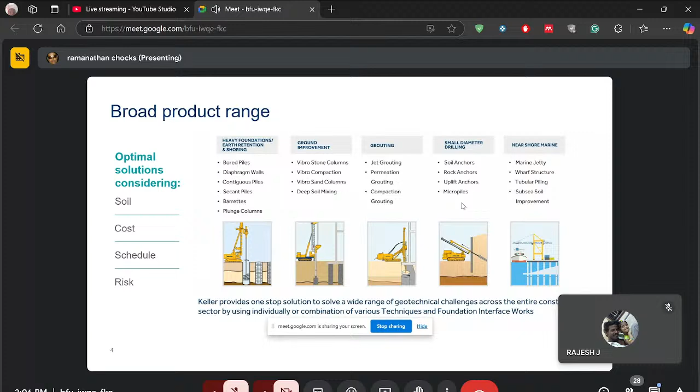To show our global presence, we are working in about 40 countries, with about 10,000 people on Keller's rolls, and we are presently executing more than about 7,000 contracts every year globally. As for our product range, we are mostly involved in heavy foundations, ground improvement works, specialized grouting works like jet grouting, compaction grouting, permeation grouting, and several types of rock anchoring and soil anchoring works. Recently we started working in near-shore marine works, not completely offshore, but near shore marine, for jetty works, the installation of pilings and jetty walls. So those kinds of jobs we have also started picking up.

So this gives an overview about Keller and our presence in the global market. Moving further, this is the overview of today's presentation which I would like to deliver to you all.

One topic is about understanding the various foundation problems. Just a few notes - most of you might be aware of some of these things already. Whatever you are aware of, you can correlate with what I'm presenting, and if anything is new for you, please take it as a good takeaway for your further understanding of the subject.

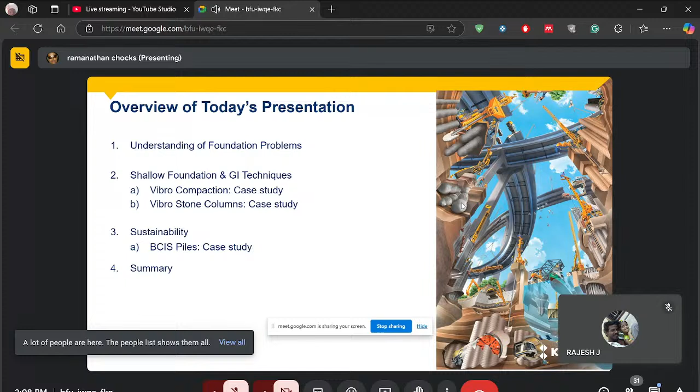We will discuss the common foundation problems, simple foundation challenges, followed by how ground improvement techniques work to address those challenges. I'm mainly concentrating on vibro techniques - vibro compaction and vibro stone columns - and we'll go through some case studies as well. Since the world is moving towards sustainability, I will touch upon the sustainability aspects and what we as geotechnical engineers can contribute. Finally, I will close with summary remarks. This is the overview of today's presentation.

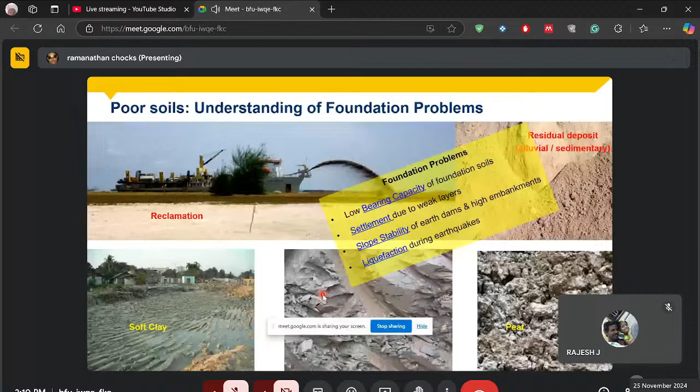So broadly, these are the foundation problems we are going to discuss in today's session. Normally the SBC and settlements might be having more clarity, but coming to liquefaction, here is a small video to make clear what liquefaction is all about.

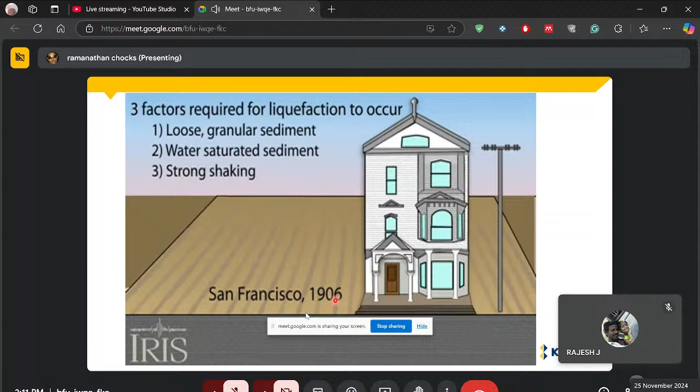You can have a structure, and you'll have deposits of loose sandy layer present beneath the ground in saturated conditions. So what will happen during shaking or earthquake conditions? The pore water pressure will have a rapid buildup and tends to seep out to the surface, generally trying to escape. During that time, the soil turns into a liquid medium, and you will have the failure of the structure. So this is all about liquefaction.

For people who are not aware of liquefaction, this is just a simple explanatory video to make you understand or comfortable with the term liquefaction.

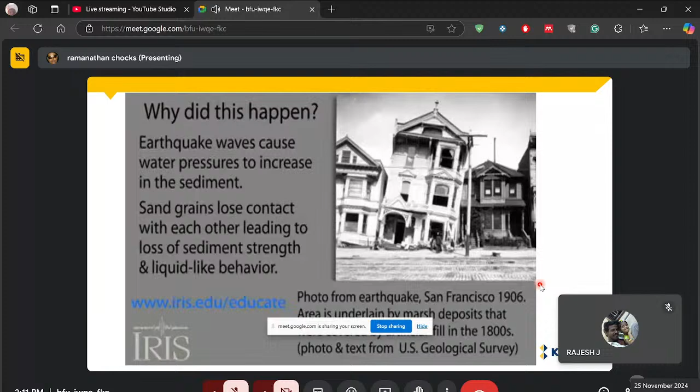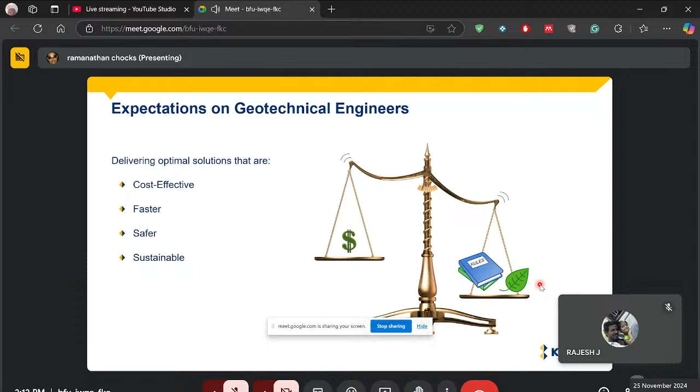So what does the industry or the expectations from geotechnical engineers look like? They always look for a cost-effective solution. It has to be faster and safer, and in recent times, for the benefit of the planet, we are moving more towards sustainability. So these are most of the expectations from geotechnical engineers to provide optimal solutions.

Coming to this background, understanding the problems and keeping an eye on industry expectations, we can address these challenges by improving the ground. One such technique is densification, where we try to compact the soil. The other one is reinforcing, where the soil is not able to be compacted, so you try to reinforce it.

For a better understanding, it's something like how we insert steel into concrete to increase its tensile behavior. In a similar way, you can introduce or reinforce the ground with some stiffer material, so that the load can be shared in a better way between the stiffer and less stiff material.

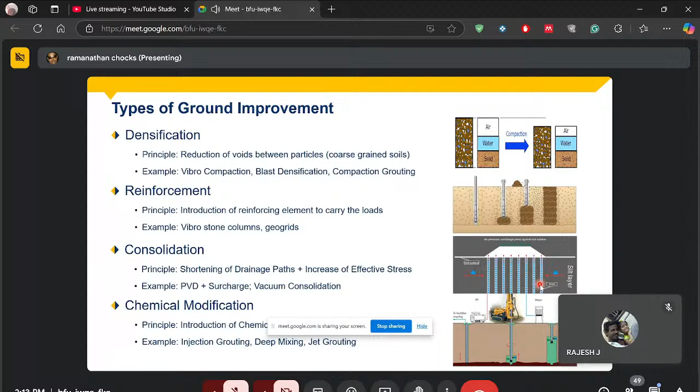The other way is consolidation. We all know cohesive soil has a tendency to hold water within it. When you apply a load on it, it tries to take the water out from the soil medium, from between the particles, the water trying to escape. But this process needs a load to act on it to extract the water from the holding soil bond, and otherwise you have to have a shorter drainage path. If the escape way is very near to its particles, then you will have a faster rate of consolidation. So that way also we can help improve the ground, because this drainage increases the shear strength.

Finally there is chemical modification. Say the soil is in one state, with its own chemical bonding, exerting certain behavioral aspects. If you introduce some other material, it will turn into a new material. In that way, the engineering properties of the soil can be modified by creating a chemical reaction within the soil and the material which you want to use. So that is chemical modification.

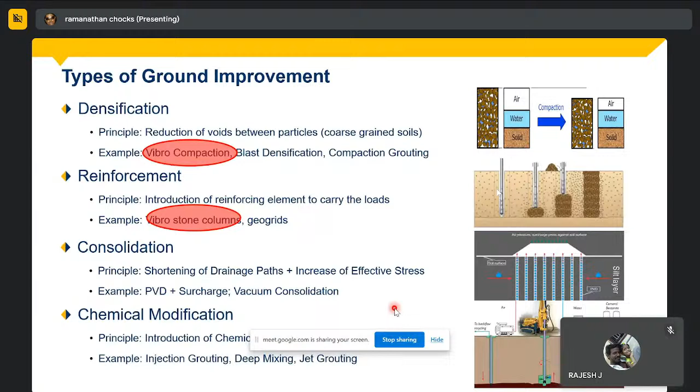So these are the common ways of improving the ground. Today, as I said, we will mostly focus on vibro techniques, that is vibro compaction and vibro stone columns.

Just to give a brief overview of where we look for ground improvement - it is not like everywhere we go for ground improvement. We will see how and when we can pitch in there and see the opportunities for ground improvement. In a conventional way, if the load is lighter and the soil is competent enough, we will go for the shallow foundation.

And if the loads are heavy and the structure sensitivity is very high, and you can't afford more settlements, you will go for the deep foundation. These are like two extremes of our conventional solutions - there's a shallow foundation and the deep foundation.

In between, there is a zone where you can afford for a little bit of relaxation in the settlement criteria, or you can afford more settlements proportionate to the load. That is the zone where we speak about the feasibility of ground improvement. So if you see here, you can see points number 1 and 2, and 2 dash, which speak about the relative load and its settlements.

So if you are allowing for more loads with less settlements, obviously we have to go for the pile foundation kind of solutions. And when you can afford more settlements, you can see the settlement value from 2 dash to 1 to 1 dash. If you see the settlement value, the relaxation is a bit more, so in that case, you can look for ground improvement.

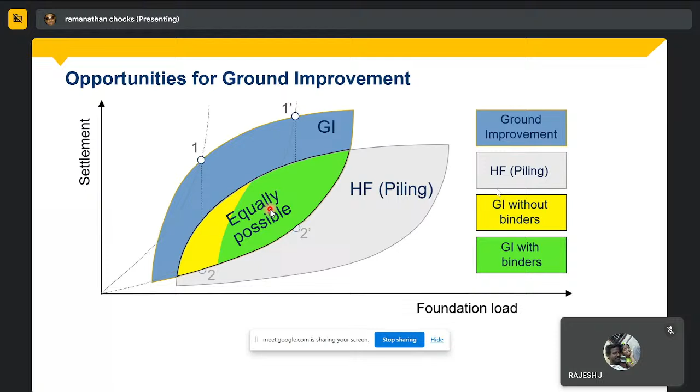So in a simple way, if you want to have more load taken care of by the soil, but you can allow the settlement to a certain extent, ground improvement is an option which is always available to look after. That's about how the ground improvement solution will be pitched in the market.

So now coming to the techniques one by one, as I said, we will consider the vibro techniques. So what is meant by deep vibro techniques? Generally, it's like a simple expansion of the techniques which we do on the surface.

So normally for surface compaction, if you are laying a road, everyone might have seen - you'll have several layers, let's say subgrade layer, subbase layer, base layer, and the top layer. But every layer will be rolled and compacted. That's what we term as surface compaction.

If the same amount of compaction treatment is required deep down into the soil profile - say 10 meters, 15 meters, or sometimes up to 20-25 meters - if you want that degree of improvement, we will opt for the deep vibro techniques.

So it depends on the type of soil material. It will be classified into vibro replacement or vibro compaction. If it is clean sand, in the sense compactable sand, so the fines content - normally we say less than 75 micron particle size - has to be less than say 10 to 12% of the composition of the soil. Then the vibro compaction is the most feasible and optimal solution.

And if the soil has more fines content - say the presence of silt, even if it may not be purely plastic in nature - if the silt content is more, whatever energy we put forward for compaction will not reciprocate or transfer from particle to particle. So basically your compaction effort will go in vain. To avoid that, it's always careful to study the suitability of the soil in selecting vibro compaction. So first let us see about vibro compaction, and later we go into vibro replacement.

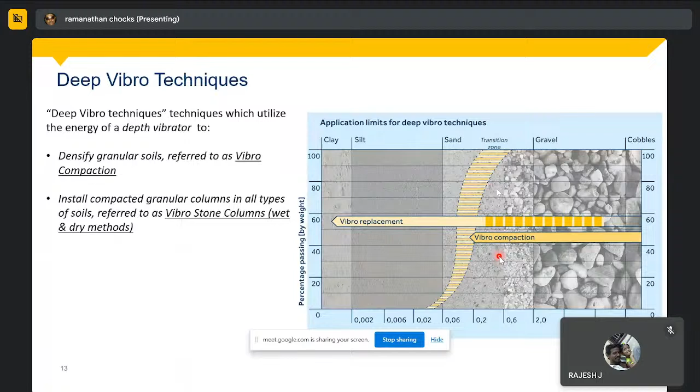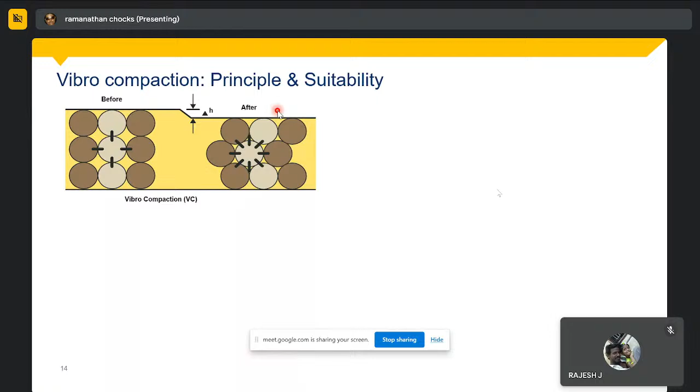So that's what really happens during this vibro compaction technique. This is like a loose stratum as an initial condition. But when you try to compact that stratum, it will move to a denser configuration. This much volume of sand has been made to subside to form a denser configuration. So either you can have a foundation at this level, or you can have additional filling from the surface to compensate for this subsided volume. So this is a simple way the vibro compaction can be explained.

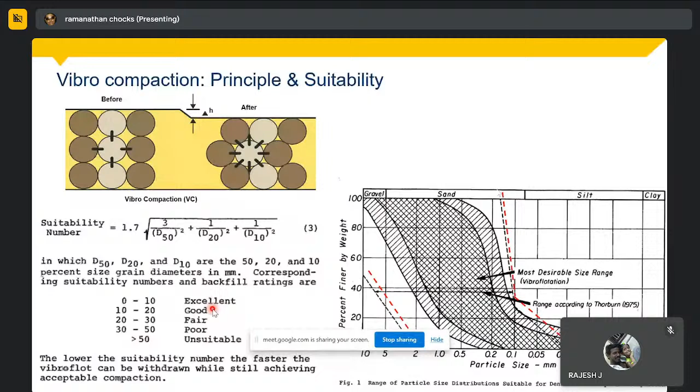As I said, the suitability has to be studied. It has to be in the clean sand range, and based on the soil grades, you'll be doing the gradation test for the soils, and you can have the D50, D20, D10 size of the soil particles. With that, we can have a quick estimation of the suitability number. If the suitability number is 0 to 10 or 10 to 20, it is of a good to excellent kind of soil for compaction. If it is more beyond that, it will be problematic to compact. If it is more than 30, we generally avoid the soil for compaction and think about other alternate techniques.

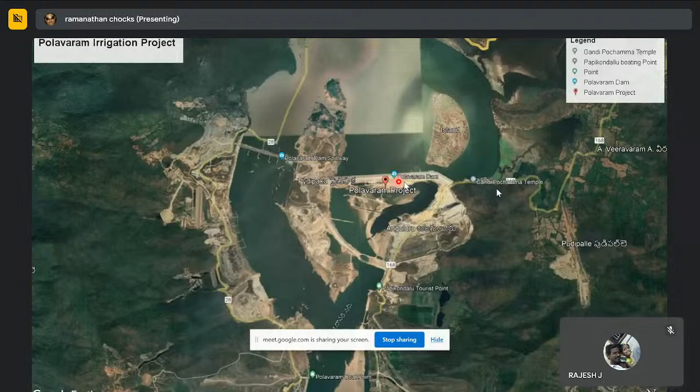To develop this dam, we'll have to construct a coffer dam. This coffer dam will be on the upper side like this, and on the lower side it will be like this. This coffer dam will facilitate the dry area for the construction of the dam over here.

The condition here is mostly soil, the subsoil condition is mostly sandy in nature, and the challenges we foresee here are mainly settlement and liquefaction. So for that, we have to densify the in-situ soil so that it takes the load with a lesser amount of settlement, and meanwhile it will ensure the minimum factor of safety against liquefaction when the earthquake scenario comes.

With all this scenario, the vibro compaction zone has been identified to be treated. Based on the suitability study, we felt that this portion has to go on stone columns, because we have the presence of more silty nature of material, or more towards clayey nature of soil over here, where vibro compaction cannot be directly employed. Hence vibro stone columns were utilized here, and here vibro compaction was carried out.

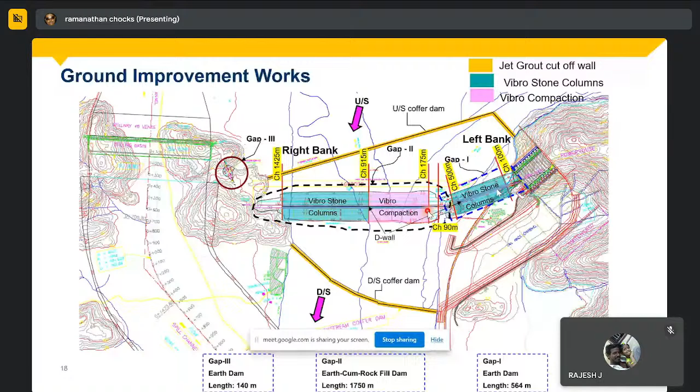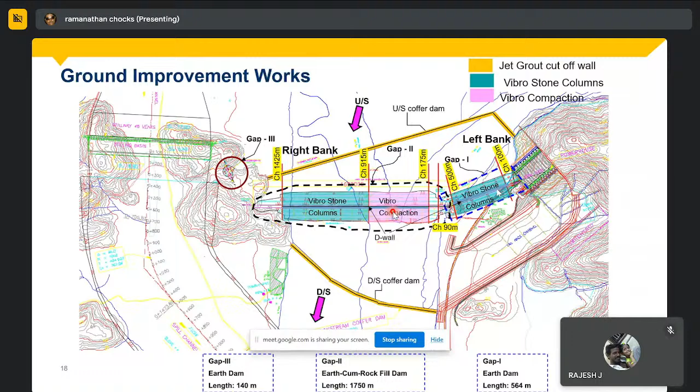This is the center line of the dam, where you will have a cut-off wall, or you can say a plastic diaphragm wall, installed all the way to the rock bed layer, and then we will have compaction on either side of the dam center line cut-off wall. This is how the vibro compaction solution has been employed for this particular dam construction.

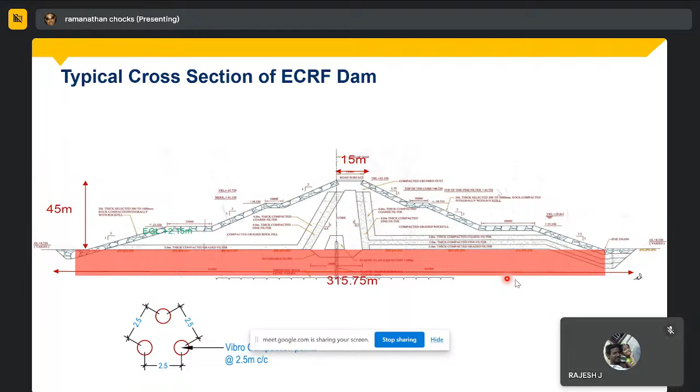You can see the top width is about 15 meters, and the height is about 45 meters, and to showcase the massiveness of the structure, it's about 320 meters across the section. So almost you can see the width of the extension from the center line of the dam. So this mass area has to be treated.

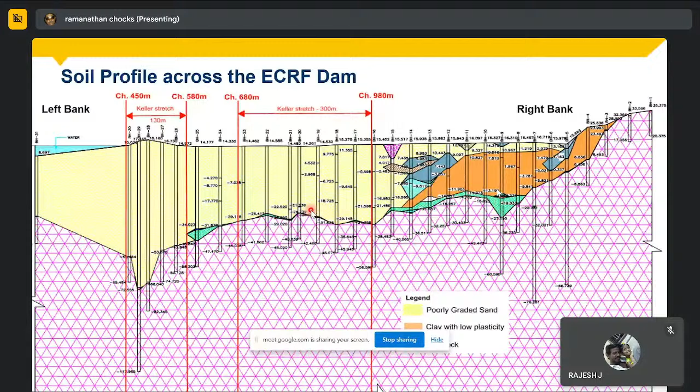This is the subsoil condition, where the condition was more towards the sandy type, predominantly up to a depth of some 18 to 20 meters, and then more towards the rock outcrop, you can see the clay deposits were present there. This is a typical condition of the particular site, and we may need to go all the way where the N values are very high, of very dense range. That is the minimum requirement for the treatment here.

Ram sir, sorry to intervene, you can just hide that band in the PPT. Hide it. Oh, this one, sorry. Yeah, thank you, thanks for notifying me.

Any job will have, we need to understand its efficacy. It's simple, like how we do a cube strength test to ensure the strength of concrete. For ground improvement also, we should do some post testing, so as to get the confidence that the ground improvement technique has done its purpose or satisfied its purpose.

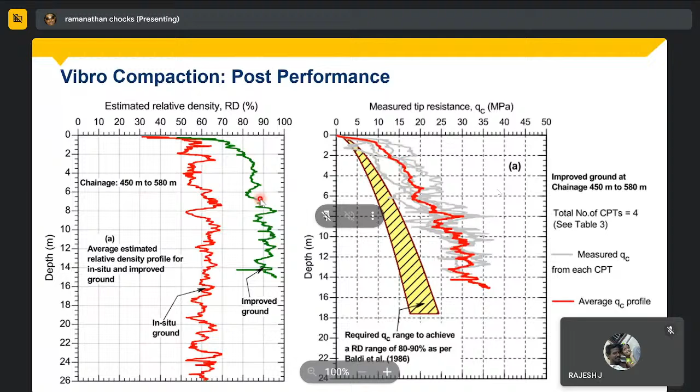So I hope everyone is in alignment with me till here. Is everyone clear till here, or do you have any doubts, or shall I proceed further? Please proceed, sir. Yeah, thank you.

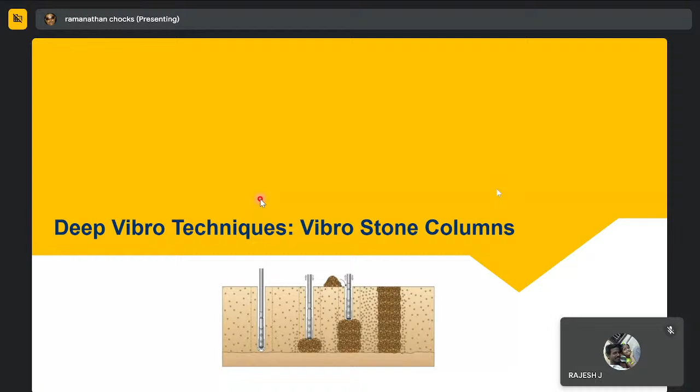So now we will move on to the other technique, that is the vibro stone column. Similarly, as I said, you will have the feasibility study - if the soil is really compactable, we can go for vibro compaction. But if the soil is not of a compactable nature, we can think of the other vibro solution, which is vibro stone columns. So we will see how the vibro stone column solution works here.

In a simple way, this is the in-situ ground, and we are inserting a stiffer material - stones - in a certain pattern or spacing, with a nominal diameter consideration. So this much diameter is the stone that is going to be formed, in a certain configuration. If you introduce this stone into the in-situ ground soil, you get a composite material behavior - that is the stone column, the ground improved with stone columns.

So what will happen - the initial C and phi properties, when improved with the ground, will have a composite behavior. So these improved properties we will consider or take into the design of the foundation or the structure, the foundation design for the structures. So this is basically how the improvement using vibro stone columns works.

Each column will have its own influence area, which we call the unit cell area. Each packet is a unit cell area. How much percentage of this unit cell area we are replacing with the stones is the area replacement ratio, and this is nothing but a function of the spacing and the diameter.

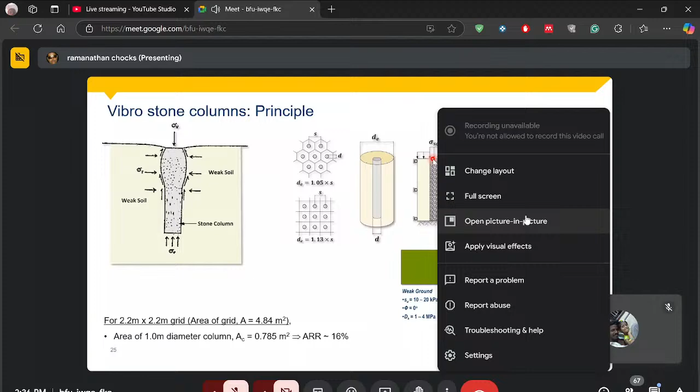When it comes to load sharing, this is not a mass treatment. You are inserting a stiffer material at regular spacing, so the load will try to share between the soil medium and the stone column member. Whatever load you transfer from the foundation, partially it is shared to the soil, and majorly it is shared to the stone column, because stiffer material will attract more load to it. That's how the stone column load sharing behavior works.

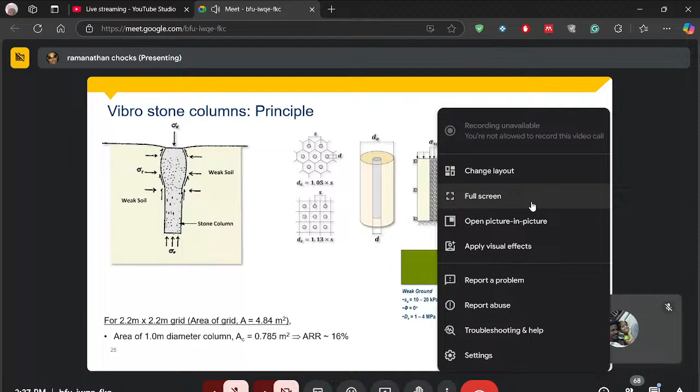With this composite behavior, you take it up for the foundation design. This is basically the design principle behind the stone column method, and globally we practice the Priebe method. Priebe is the one who gave this understanding of the stone column subject with composite material behavior. There are several other ways of designing too, like in IS codes, where we design the stone column based on its own capacity, similar to how we design a pile. That's another approach for stone column design.

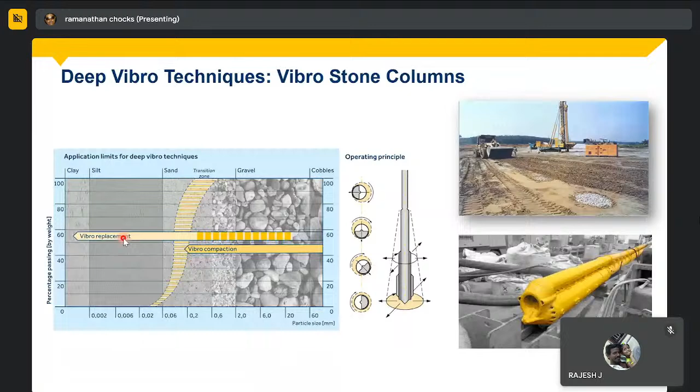The range of application is more for vibro replacement. It can even be used for sand where fines are in the range of more than 10 to 12%. Even into clay and silt, we can employ this methodology of vibro stone columns.

So there are two methods for carrying out this stone column technique: one is the wet top feed method, and the other is the dry bottom feed method. Design wise it's the same, but how it translates into the ground can be done in two different ways. From the terminology itself you can understand what wet top feed means.

Wet means we are using water to penetrate into the ground, similar to how in vibro compaction we need the support of water to penetrate, and we feed the stones from the top - that's why it's called the wet top feed method. With the water jet, the probe penetrates, and from the top we feed the stones, which travel through the annular space created by the vibrator and reach the bottom, getting compacted there. That's how the vibro stone column is formed to the required diameter. Based on how much volume is consumed for a particular column formation, the diameter can be verified. So that's what the wet top feed method is all about.

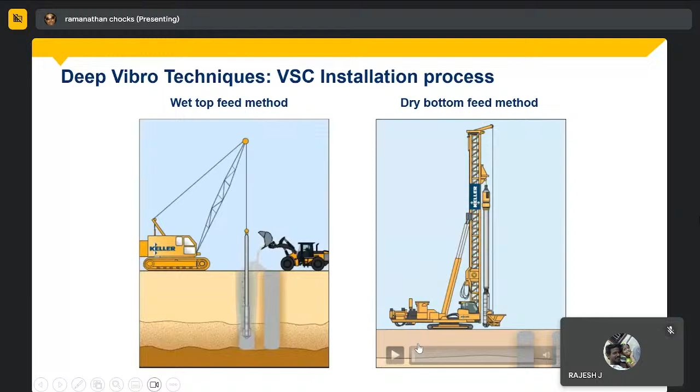Moving on to the next one is the dry bottom feed method. As the name suggests, it's dry, so no water is utilized for this formation, and it's a bottom feeder, so the stone has to be fed directly to the bottom of the hole which we are penetrating. This is like a Keller-made vibrocat, and you will have the vibrator setup here, which penetrates on its own thrust and the power of vibration.

Once it's penetrated to the desired depth, the stone is fed to the hopper, and this takes it into the stone tube. All the way down you will have this stone tube, through which the stone reaches the bottom. Once it reaches the bottom, it will be compacted in stages. So this is the other way of forming the stone column.

There are several factors based on the soil condition, based on water availability, and so many other factors in selecting the particular method of vibro stone column installation.

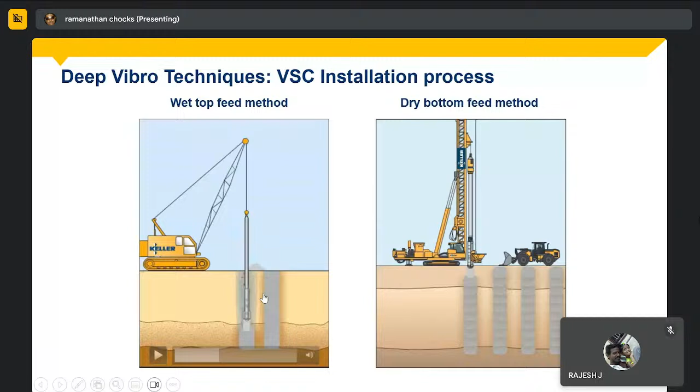So hope you are very clear about the types of techniques we can use for the vibro stone column process.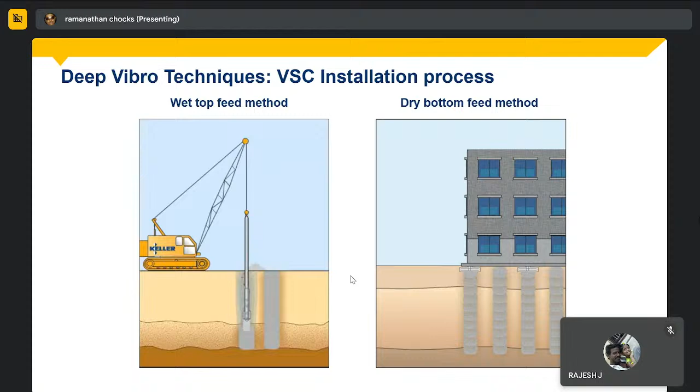As I said, this will be crane hung, and you will have the rotating motor here, and water jets through this nose cone. Through this only, the water will be pumped or jetted into the ground to create the cavity formation. As I said, in the dry method, you will be having a stone tube all through from top to bottom, giving provision to take the stones to the bottom. And you will have the vibration, the eccentric weight here to create the oscillatory movement within the particular point.

Once the stone reaches, you push the vibrator up and down so that it gets compacted properly. Unlike a pile, we are not forming a pile here. Basically in a pile, we can have a very uniform diameter formation, because you are completely drilling a bore, taking the muck out, and completely concreting it.

So the diameter formation will be more uniform in piling, whereas in the stone column, it depends on the nature of your stratum. Your diameter formation will vary. You can see here, it's not uniform - you can see a slight bulge. This means the soil is weak enough over here, which is why it is consuming more aggregates.

And if you see here, it has a lesser diameter, which states that the soil is a bit stiffer in nature, that's why the consumption is less. So that's why you are not forming a pile - instead, you are forming a granular column, which will not have a uniform diameter all the way.

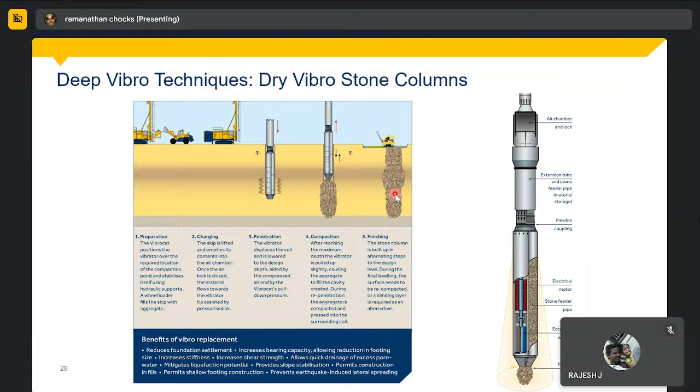This is a common doubt we get from those from non-geotechnical backgrounds, who put forward this question to us so many times. So this is for better understanding.

As I said, we have these vibro techniques. One way, after completion of all tests, we can have ground testing like post-performance testing in terms of penetration tests and all. But during the column build-up itself, we will have real-time monitoring of how the column is being built inside the ground, or how the ground is getting compacted, so that we measure it in real time.

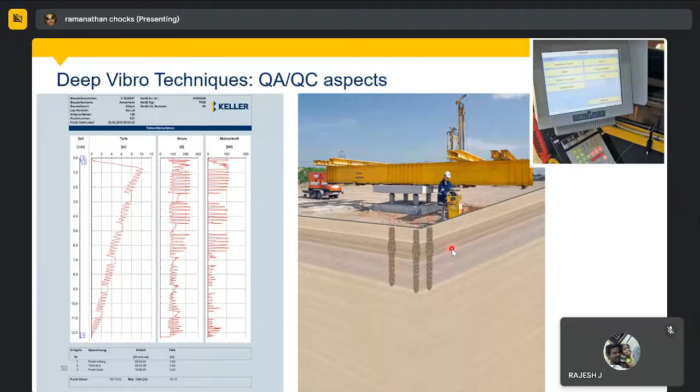And finally, through liquefaction mitigation: one way against liquefaction is to have your soil in a more denser state. If the soil is loose in nature, it has to be improved to a denser state so that liquefaction will not occur. The other way around, during the fraction of seconds, you will have a huge accumulation of pore water pressure, so that has to be taken out. For that, this shorter drainage path will help you, so that the accumulation of pore water pressure will be reduced, and that also provides a way to mitigate the liquefaction.

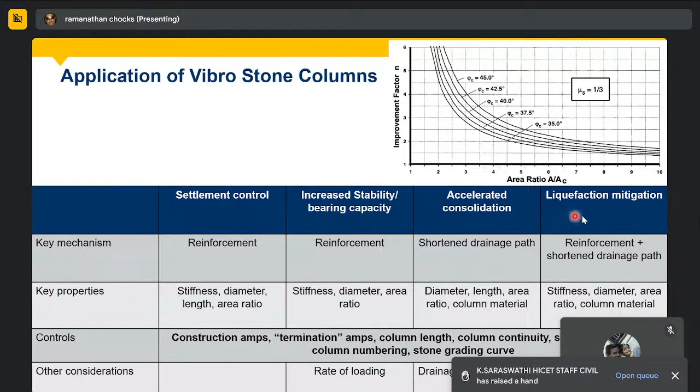So this is all about the application of the vibro stone column. We have covered the application part. Now we will go through a few case studies which we have on vibro stone columns. One area where stone columns work most effectively is for foundations, for tank foundations.

So we have several refineries all through the country, mostly located along the coastal regions. Say right from Paradip, it may be Krishnapatnam, Tuticorin, or somewhere in Cochin, or somewhere in Gujarat.

If you can see all the coastal area extending to Mangalore, all this coastal area will have challenging ground conditions, basically weaker deposits. All the incoming crude oil supply we take from external countries will be stored here and transferred to other nations.

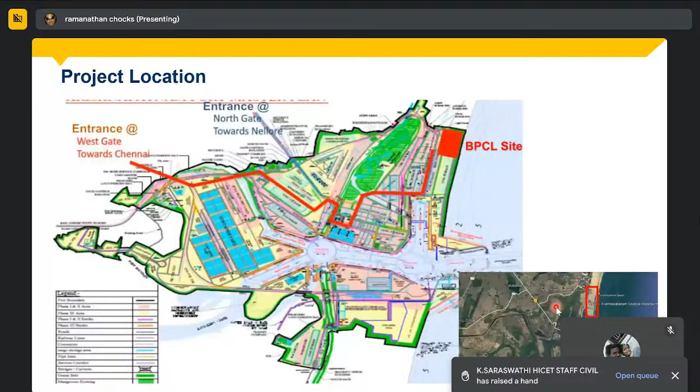Or sometimes if you want to export the treated fuels, that also needs storage facilities. So to facilitate this, we will have so many storage tanks built in the refineries or marketing terminals all through the coastal borders.

So we have this kind of tanks, and the solution of ground improvement is more viable for the tank foundations, mainly because for tanks we have allowable criteria like 150mm to 300mm on the edges, depending on the type of roof. The allowable settlement range is between 150 to 300mm, which is a performance requirement for the tank cases.

The loading intensity generally ranges from as low as 120 or 130 kPa to as high as 250 kPa. Something like 15 to 25 meters of storage height. In this particular case, it's 15 meters storage height.

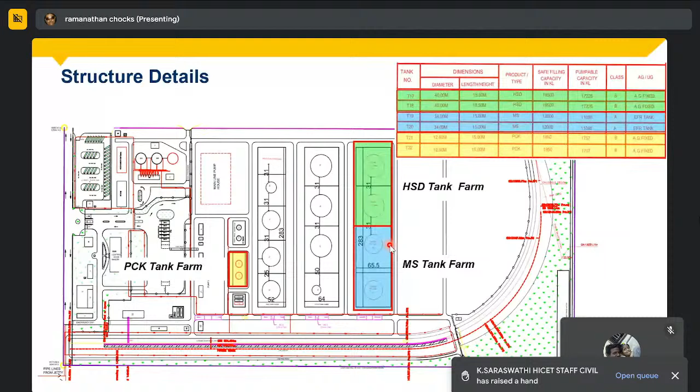And the tank diameters, you can see it's something like 40 meter for 2 tanks, 34 meter for 2 tanks, and 13 meter for 2 other tanks. So these are the tanks which we have treated with ground improvement using vibro stone columns.

So I explained the performance criteria just now. Here 180 kPa is the design loading intensity of the tanks, and the performance depends on the type, based on how the tank's roof is designed. If it is a fixed roof, the criteria allows for more settlements.

And if it is a floating roof, basically upon filling the liquid, the roof top will move, it will just float on the liquid we are storing. That floating roof will have more stringent settlement criteria - allowable settlement less than 150mm for the floating roof, less than 300mm for the fixed roof.

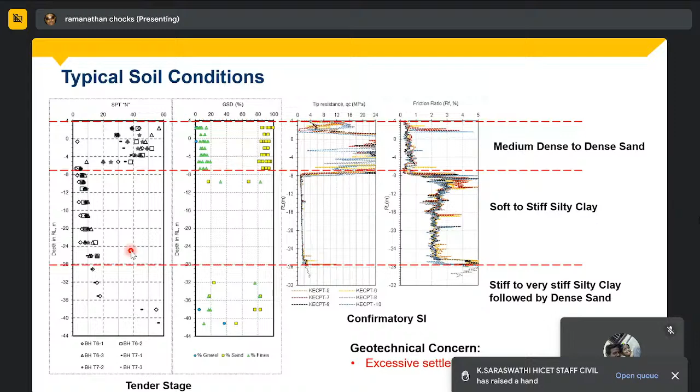So that's how the vibro stone column has been employed. The maximum ratio was about 33%, and the minimum for the smaller tanks was about 18%. We formed about 800mm to 850mm diameter stone columns, all the way up to 32 meters deep. In fact, this is the deepest stone column on record in India, beyond which no stone column has been carried out so far.

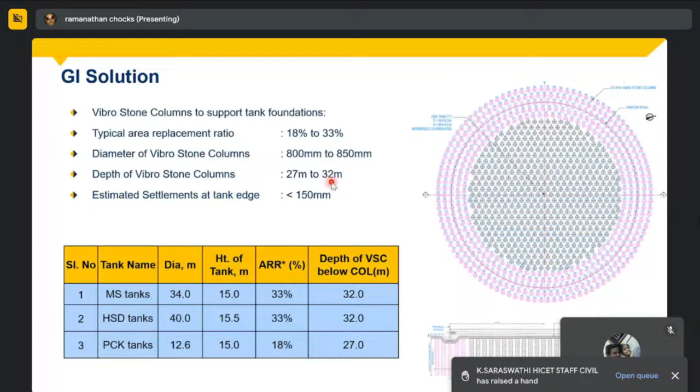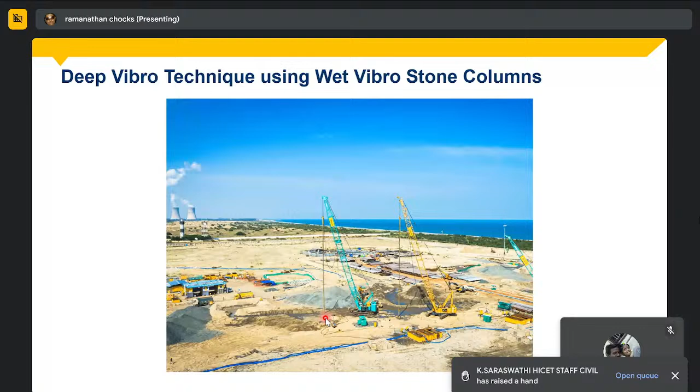So this is a site setup where you can see the crane. This improvement was done using the wet top feed method. You can see the vibrators, and with the support of water, it has been penetrated into the ground for the formation of vibro stone columns.

This is a typical M4 record of the vibro stone columns. As you can see, we can reach almost 32 meters. This is a scale of 40, and we have reached about 32 meters over here. And then this is the washings, basically to create annular space between the vibrator and the surrounding soil. Then only the stones will flow through this medium. So this up and down movement is called washings.

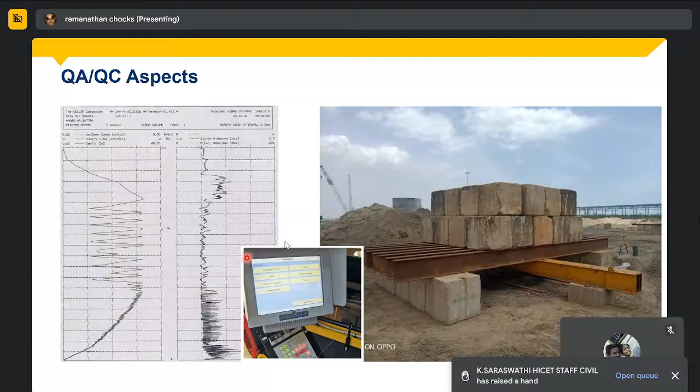And once we have sufficient washings, we will feed the stones from the top. So from here onwards, you can see the compaction, consistent compaction effect witnessed over here, and the column has been formed successfully. For the post performance, we will test with the load test.

So this is the completed view of the tanks, where the tanks have been completed and handed out for the superstructure erection, where steel elements will be placed on top of this to form a storage tank on top of this ground.

So moving on to the next case study, this is for a food production manufacturing plant in Assam. Assam is a seismically vulnerable zone, high risk zone. So here the problem is liquefaction. It's about 34,000 square meters of area. The plant is supposed to be established, but they can't take chances with this seismicity.

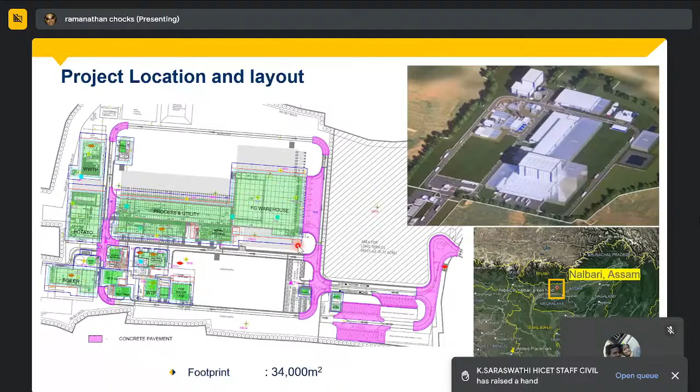So they wanted some ground improvement. And to complicate the problem further, they have very soft to medium stiff clay layers at the top, and then a liquefiable sand layer at the bottom. So it's not one problem, it's really two problems: the problem of settlement and bearing capacity with the clay layer, and the problem of liquefaction with the sandy layers at the bottom. So these two have to be addressed.

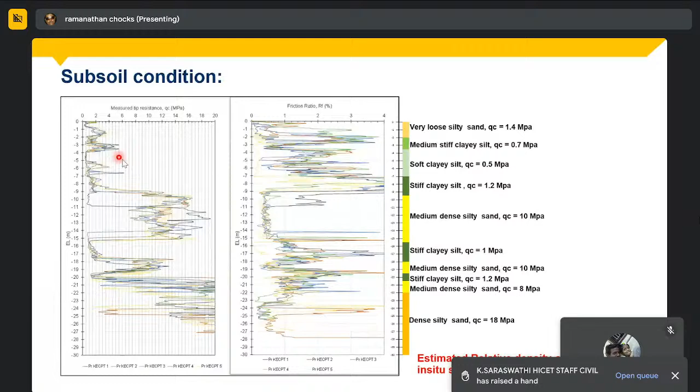So again, the criteria was something like 100 to 140 kPa loading. Here, almost all the foundations were shallow foundations, and so the settlements, as per IS code, were allowed only up to 50 mm. But for the raft, it was about 75 mm. These were on the long-term perspective.

So once the structure is during construction stage, the settlements will undergo. But because of no external connections, it's still allowable. But once the structure is completed or into service, you can't allow more than 50 mm or 75 mm for the given load of 100 kPa and 140 kPa.

And seismically, we have to design for this, the most stringent seismic criteria we have in India. That is the Assam region, Assam and North Himalayan regions have this criteria. It will be categorized under zone 5 with a PGA of 0.36 and magnitude in the range of 7 to 7.5. So your factor of safety against liquefaction has to be greater than 1.

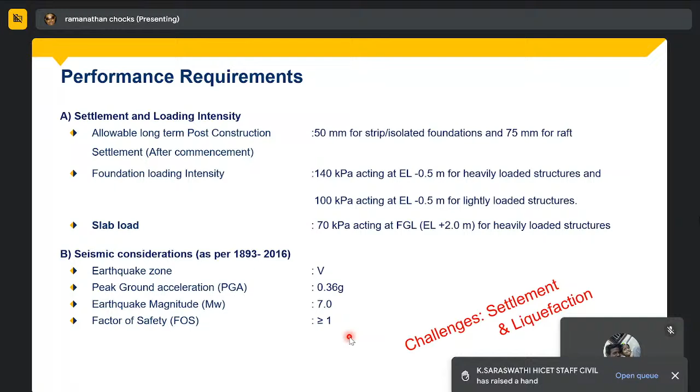So here we proposed an innovative solution of having vibro compaction and vibro stone column. Vibro compaction will be done for the bottom half portion, and vibro stone columns will be done for the clay soil. Because the sandy soils were found to be very clean in nature, they are compactable. So we used the same instrument and the same material.

Setup. It will go through the bottom, compact the bottom soil, and then when it reaches the clay stratum, the stone column will be formed the same way. So it's an innovative approach we adopted here to pass on the benefit of optimization to the client, so that they would be financially happy to see the reduced cost of the project.

So this is all about the solution we employed for this food production facility. Here the maximum ratio was about 32%, and the depth of treatment was almost 20 meters maximum we went. 16 to 20 meters was the depth we treated here.

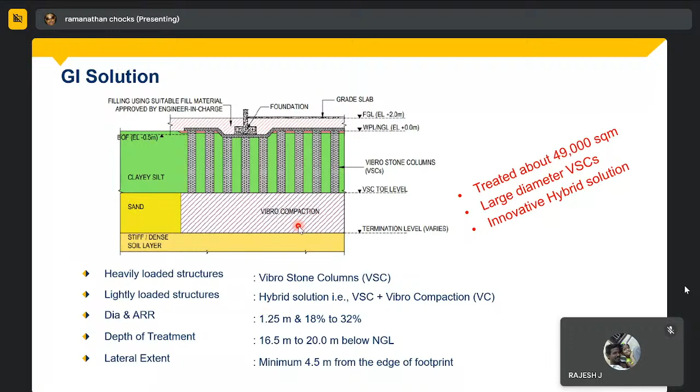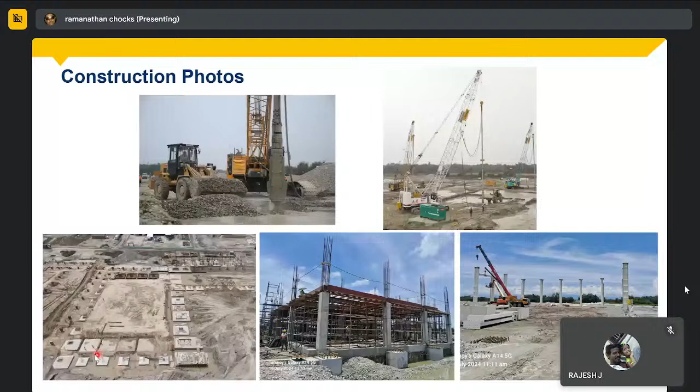These are some construction site photos where the ground will be improved with the stone columns, and you will have the foundation construction on top of that, followed by the superstructure construction.

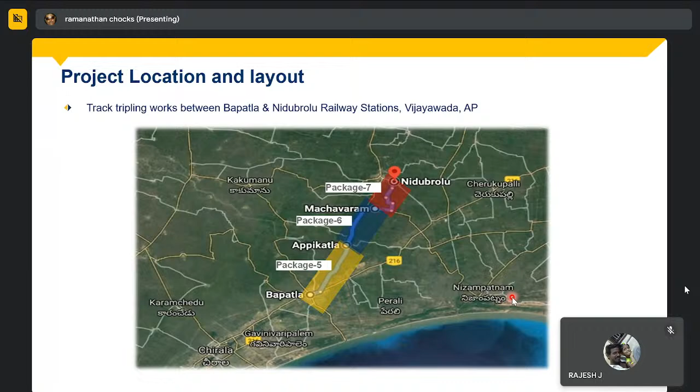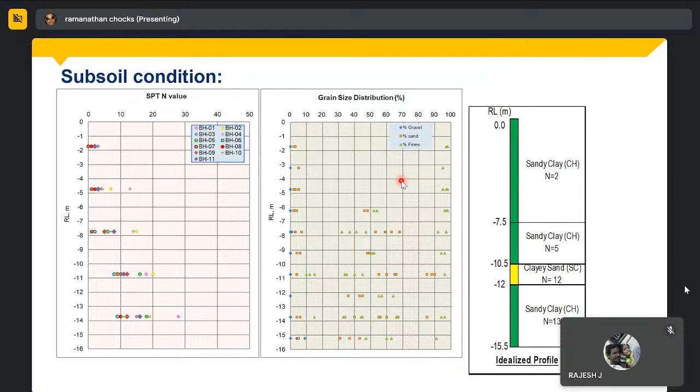Moving on to another case study of railway embankment. This is a very interesting case study for a station line doubling, basically tripling, of an existing railway alignment. It is in Andhra Pradesh, where the soil type is sandy clay in nature, soft to medium stiff, for the top 10 meters, which has to be improved. Otherwise, to ensure stability of the embankment, this ground has to be treated. This is the existing alignment, and you want a new alignment with improved speed, so currently there are some speed restrictions.

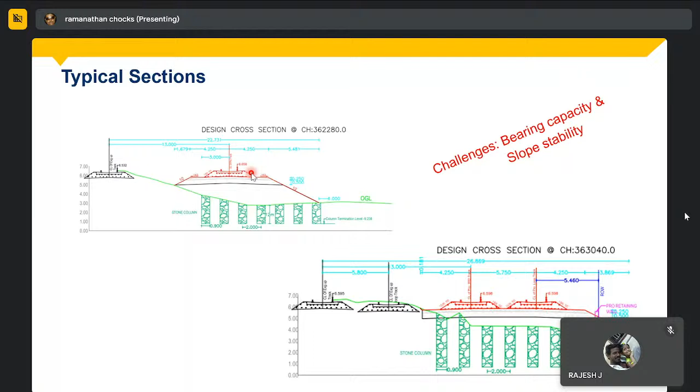To achieve proper stability at higher speed, they proposed vibro stone columns to improve the ground in the weaker profile sections. Here we carried out vibro stone columns next to a running line - a live line with many trains passing every day, a busy route. We had to execute the works very close to this working railway line. The depth of treatment here is about 12 meters, with an 18% area replacement ratio adopted.

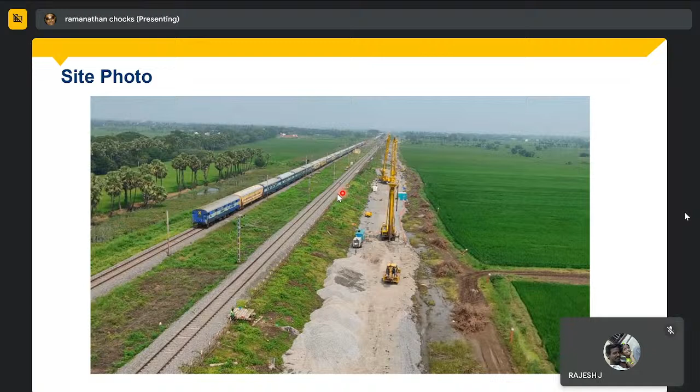Moving to the final case study, a mounded storage vessel. This is very common - storage of fuels happens in circular tanks, and for more inflammable materials, they use this mounded storage vessel, which is the safest mode for storing LPG. This particular facility is for a marketing terminal, for the Indian marketing terminal in Chennai, where you get domestic gas supply. This is where LPG gas gets stored, which will be filled into cylinders and delivered to your home. So this is the storage facility.

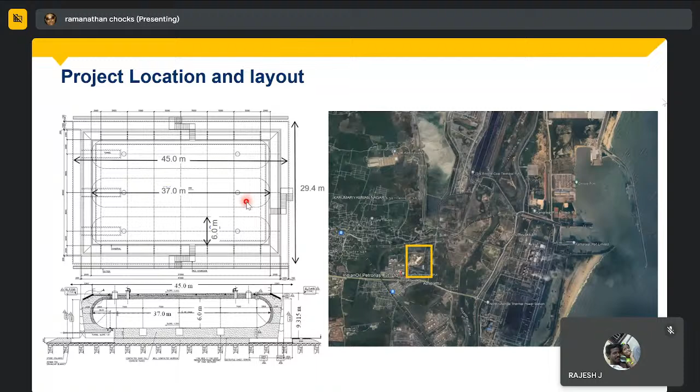Here spherical members will be embedded into the soil. This is the ground surface, and on top of that you create a mound, basically a soil mound. Within the soil mound, we embed these bullets - steel vessels that look something like the petrol carrying vessels you see on lorries on roads, bullet-shaped in nature. These larger bullets are embedded into the ground and covered, for safer storage of inflammable materials. But the performance requirements are very stringent for these mounded storage vessels.

So here the problem is we have a loading intensity of close to 160 kPa, but we have 8 to 9 meters thick deposits of soft clay. You can see here the color - the green indicates the clay nature and the yellow is the sandy nature. So the predominant governing problem here is the settlements we are expecting from the weaker clay layers.

And to some extent, because of the recent upgradation in seismic codes - even though you are in Chennai, if the sands are a bit loose in nature, as per the codal provisions this falls under zone 3 category, which tends to liquefy during a seismic event. So the problems of settlement and liquefaction have to be addressed by the ground improvement solution we are proposing here.

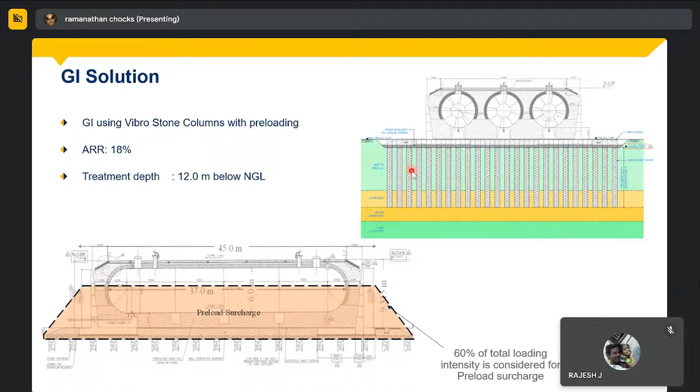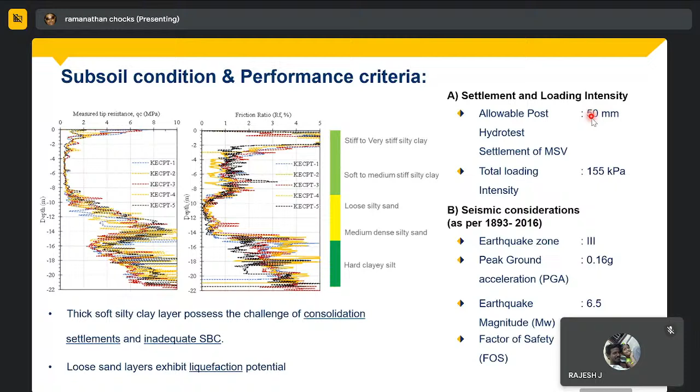Moreover, the concept of reinforcement as well as consolidation will be effectively utilized here, because the estimated settlements for this thick soft clay deposit are very high. At the end of the day, we can allow only 50 mm settlement during the service stage. But the estimated settlement is in the range of 200 to 300 mm even after the improvement.

So what we have carried out is preloading. We have kept a partial load of the future loading intensity - as soon as we treat the ground, we fill it with say 60% of the future load made into a soil mound, and this area has been preloaded before construction of the structure.

Once this preloading is done, and if you are satisfied with the settlements and the degree of consolidation of that particular soil for the given loading intensity, then we can allow for the construction of the mound. So it's like doing things in stages.

You take the ground at the first instance, then load it with the dummy load - a preload surcharge - and once the settlements are as per your expectations, you take out that surcharge and start constructing the original structure, eliminating the risk of later settlements in the structure. This gives you very high confidence on future settlements.

So this is the final results we have taken during the final hydro test. Even though we had estimated roughly about 200-300 mm during the initial stage, during what we call the leakage test, before operations they carried out this hydro test, and during the hydro test the settlements were in the range of 30 to 60 mm.

This is the maximum possible load, because the leakage test is always carried out with water, but the actual fluid will be like a gas or some other fuel, about 0.5 to 0.6 times the unit weight of water. So the actual load will be lesser than the water load, and even for the water load itself, the maximum settlements were only 30 to 60 mm.

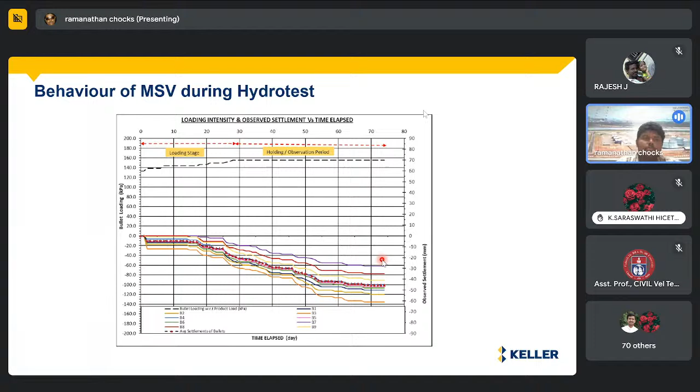So this is all about the solution I'd like to state here regarding the vibro techniques. Going forward, we are moving into a new world of more sustainable visions. So just to give a brief view from the sustainability point of view, I'd like to spend another 10 to 15 minutes on this aspect as well.

As I see it, the pollution and emissions - basically the carbon emissions - are increasing day by day. Over a larger period, the last 60 to 70 years where the industrial revolution has been taking place, we could see more increase of carbon emissions, and we are contributing about 7% of the global carbon emissions.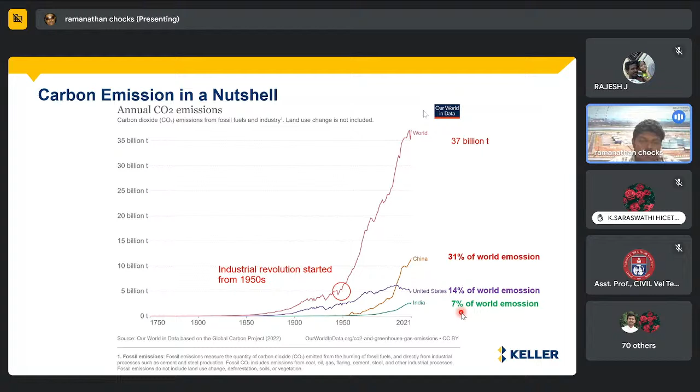So this is like a carbon cycle from where it originates to where it will end. We extract the raw materials, transport it, manufacture in some plant, and then transfer the final product to some construction material. That material will be used, and during its operation you will be emitting more carbon. Finally, once it's done its service period, it will be demolished and filled in somewhere. So this is how the complete carbon cycle of the construction industry looks like.

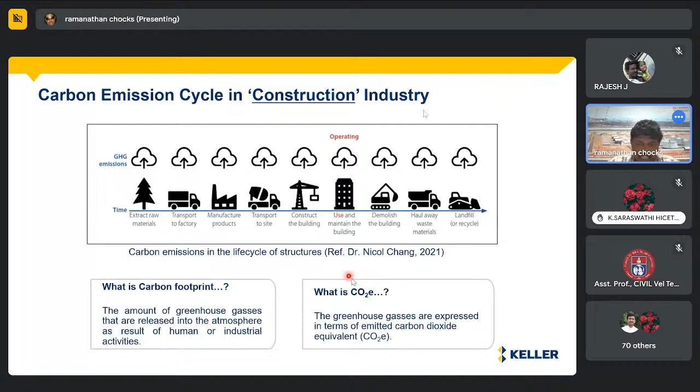Basically, it's the amount of carbon being emitted during each and every stage. That's why we refer to it as CO2 emission, carbon emissions.

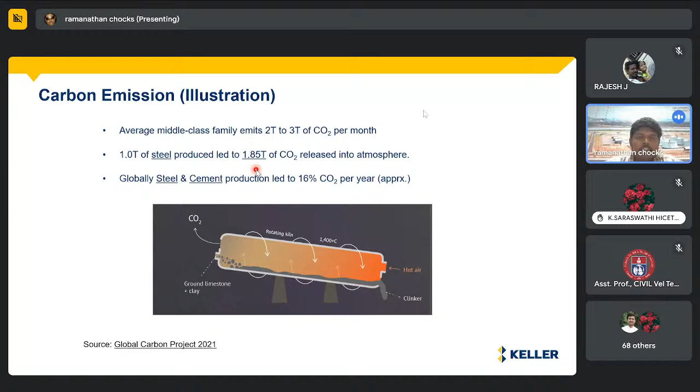So why is it very important? Because we are using materials like cement and steel, which are unavoidable for our construction industry. However, they are major contributors to carbon emissions. Cement and steel put together contribute almost 16% of the CO2 emissions per year. And 1 ton of steel will emit almost 1.85 tons of CO2 emissions.

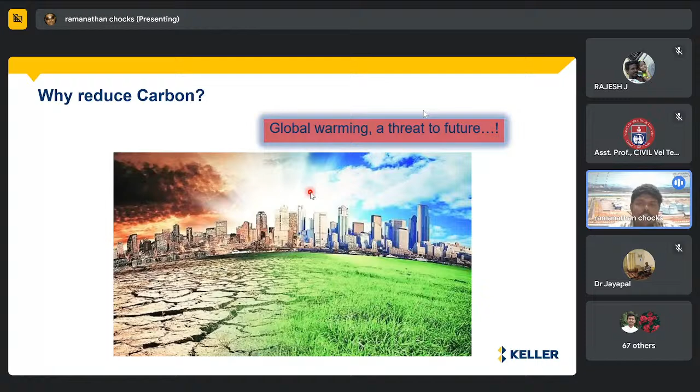But you will be really shocked by the other number to rectify the impact of this one ton of steel. You need a forest of 2.4 acres of fully grown trees, not smaller trees, to compensate for the emissions of this 1 ton of steel that is going to be made. Imagine how many tons of steel we are dealing with every day across the country for the construction industry. That's why it's really a threat for our future.

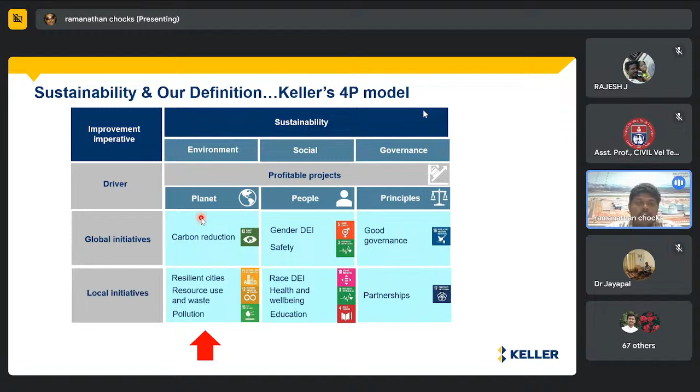As a company, we have 3 main objectives because the UN has set almost 17 sustainable goals and parameters, out of which we have taken planet, people and principles as the 3 major goals, and carbon footprint reduction comes under planet. That's why our interest is towards the planet, and in what way we can contribute to the reduction of carbon.

So these carbon emissions are basically studied under 3 scopes. Scope 1 is the direct scope - during construction time, the emissions from fuel consumption and machinery. So all that comes under scope 1.

Indirect emissions are something like what we are dealing with right now - if you are in an office space, a closed environment, using light, using battery power for this presentation, using internet power for the office space. Everything comes under scope 2. But the contribution from scope 2 is very little compared to scope 1. Scope 3 contribution, however, is very high compared to scope 1.

This is a major contributor, coming from materials like cement and steel - this is scope 3 of carbon emissions. So this is how carbon is categorized by the global committee, and we are looking at how at each stage, each scope, we can reduce the carbon we are working with.

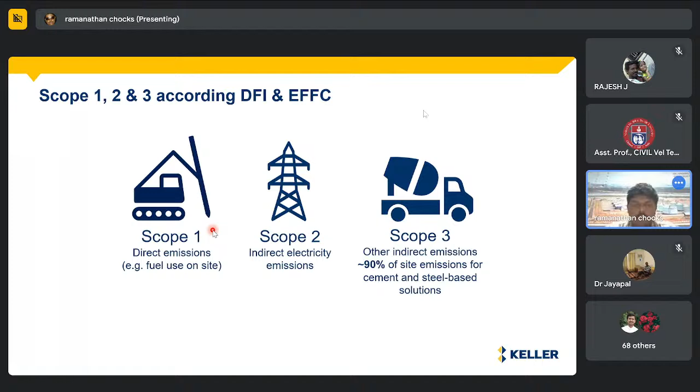So these are like a carbon hierarchy. The first and immediate way is eliminate. If we have a chance to eliminate something - say steel and concrete which mainly form a major component of the piling - if by doing ground improvement I can eliminate the piling, it's well and good. So I am directly eliminating the footprint.

Another way, if I can't avoid the piling, I can reduce through optimization - figuring out exactly what diameter and length is required, or optimize the design so I can reduce the contribution of cement and steel there.

In another way, if reduction is also not possible, you can substitute. Say instead of the normally employed OPC cement, it can be compensated with slag cement, which is generated from recycled materials. Even steel at times comes from recycled material rather than raw steel - used materials that have been recycled and reused for construction purposes. That kind of substitute can be made for construction. So that's how substitution works.

And finally, if nothing else helps, we have to compensate - say, planting trees or buying carbon credits. A lot of carbon credits are working globally, so we have to deposit some amount. But this is the final thing, which not every single person can accommodate, but to a possible extent we can concentrate on eliminate, reduce and substitute. These need not be only in our construction activities - we can practice them effectively in our regular day-to-day life as well.

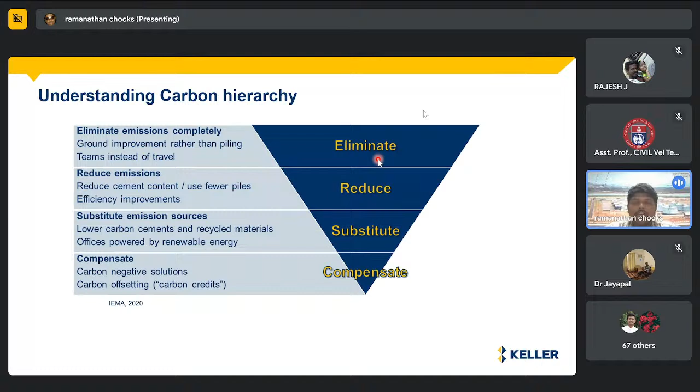So if you are going out, everyone should just switch off the fans or lights when you are not inside. That kind of simple practice in our way of living can help in the reduction of carbon.

So this is just a small comparison which we have practically executed. For a particular tank, when it comes to us, it is proposed on a pile foundation. But seeing the geotechnical conditions, we gave a thought that instead of bored piles of a certain length and diameter, we could optimize with vibro stone columns or vibro techniques, which are more sustainable in nature. This will also have some carbon emission, but you can really compare the scales of how much emission will take place versus how much this will consume. Based on that, we can provide a better solution.

So in our case, this is a pile foundation, and you can see the carbon emissions in the range of 12,000 to 14,000 tons. Putting together all the primary and secondary sources, we are resulting with 21,000 metric tons of carbon emissions.

We have employed an environmental engineer for this particular activity, who helps us in estimating the carbon. We have a carbon calculator, which everyone can also download from the internet, and he supports us in estimating the carbon emission for each and every product we are going to use in the ground.

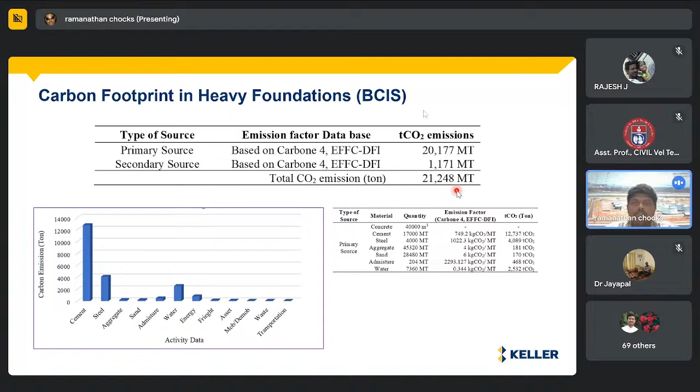So based on the workings, it is estimated about 21,000 metric tons of carbon is seen from the pile foundation. But for the similar case, if it is really feasible - and in our case it was feasible - with the ground improvement technique, we found the amount of carbon emissions is very meager, say a mere 803 tons. It's not even close to 1,000 metric tons, because the main factors are only the stones and the installation point of view, and these are the other resources we need.

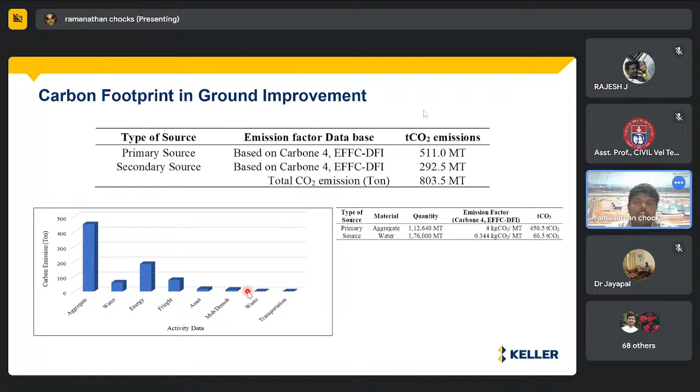So with this, we could effectively achieve a 95% reduction in this particular project. But I can't say that everywhere the use of ground improvement will have a 95% reduction - definitely it will have some significant reduction when compared between piling and ground improvement.

This is one way, because mainly we geotechnical engineers are the first ones to hit the ground. So we have a larger vision towards how effectively we can plan and provide a sustainable solution for the future. This is in our hands, which you can take along with us for a better future.

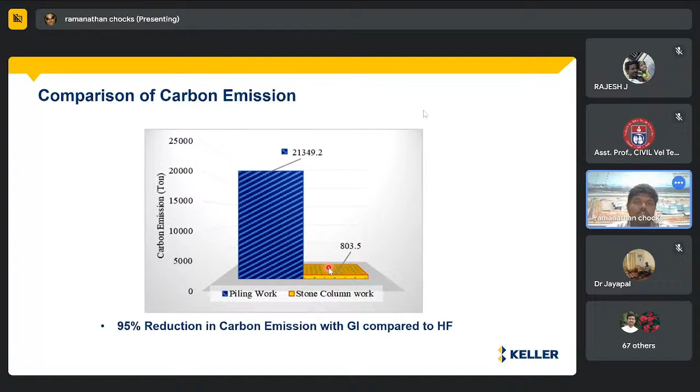To summarize, we have seen the foundation challenges and different types of common foundation challenges for structures, and how vibro techniques can be effectively utilized to provide optimal foundation solutions. And even if you have a very confident soil investigation with reliable soil data, you can really do an optimal design solution, which will result in good savings in both cost and time.

Further, in terms of sustainability, if you use some native materials, it will have a greater influence on carbon reduction. There are recycled or alternate materials - if you think about it, you can reduce, eliminate, or recycle the materials. It will have significant reduction in the carbon footprint, I mean carbon dioxide emissions.

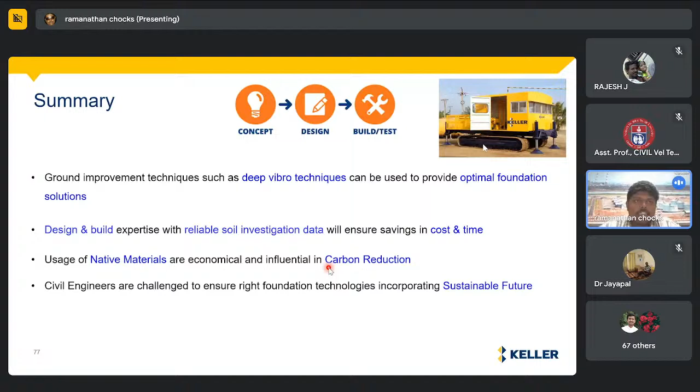Finally, we civil engineers are challenged to ensure the future with the right foundation technologies, incorporating a sustainable future. With this, I would like to conclude my presentation. The forum is open - first of all, thank you for patiently listening.

I don't know how much value I could add through this session. So if there are any questions, you can feel free to ask me. If I have an immediate answer, I will respond to you. If not, don't worry, I'll do my checking and get back to you for sure. So that's all from my end.